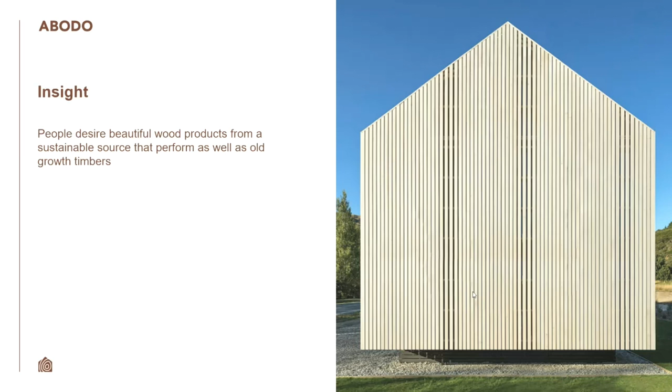So with all that in mind, why do people want tropical hardwoods? People don't necessarily want to deforest tropical rainforests, but what they do want is a timber that looks nice, performs well, and is durable. So we were thinking here in New Zealand, we've got a whole load of plantation timber, and how do we transform that wood that is not stable, not durable, and unattractive to have all of these aforementioned properties? So on the back of that, we formed this ethos and we created this purpose for the business, which is creating a lifetime of beauty with tomorrow in mind.

There's a lot of talk about sustainability and eco labels. Sustainability for me is pretty simple. Is there going to be the same amount or more of this resource for future generations? If yes, then it's sustainable. Or if there's not going to be the same amount or more of this resource for future generations, then it's not sustainable.

And when the Europeans arrived from Northern Europe and the UK, they were confronted with an island that was heavily forested in subtropical rainforest. Trees had never been seen by humans before that were 1 to 2 meters in diameter. And the Europeans, naturally, they got quite excited when they saw this and they started felling the trees, and they did a pretty good job of it. They managed to deforest over 75% of what the landmass was in about 100 years.

The wood was shipped back to the UK for the Royal Navy and other various use case applications. A certain amount of it was used to build New Zealand homes. 95% of New Zealand homes are built from timber frame, timber cladding, etc., much like you'd see in the Pacific Northwest or Canada.

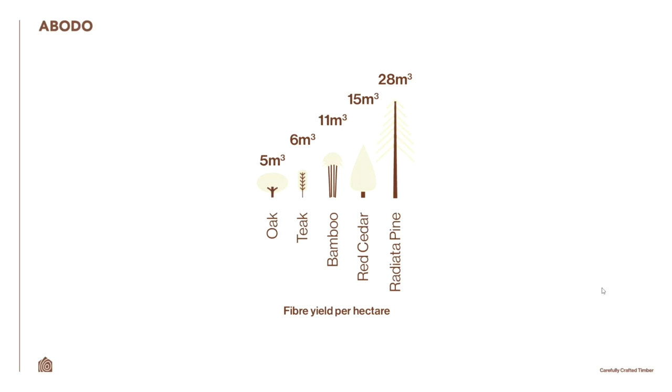Radiata pine's not special. All wood stores carbon. I'm just pointing out that radiata pine stores carbon faster than other species. There are other fast-growing species as well. For example, eucalyptus is also quite fast-growing. Compare that with something else that's commonly used, such as old-growth Siberian larch or old-growth western red cedar, and we're talking about 10 times quicker from a carbon perspective.

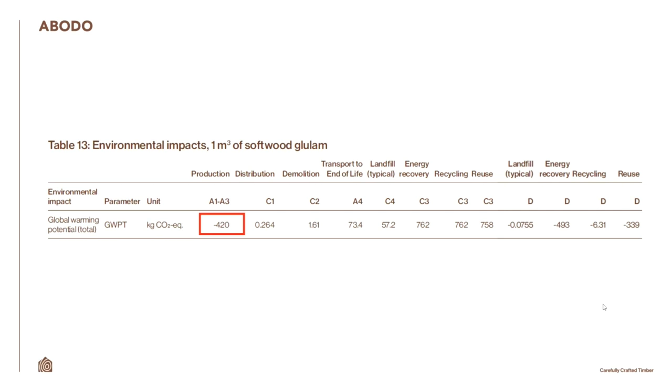For Abodo Vulcan laminated vertical grain, after the thermal modification, laminating, transport to and from the forest, and 21,000 kilometers of sea freight over here to the UK, we're still storing 420 kilograms per cubic meter of carbon. As I mentioned, our EPD covers all of our product variants, so Vulcan sawn, profiled Vulcan. It covers all of our product variants.

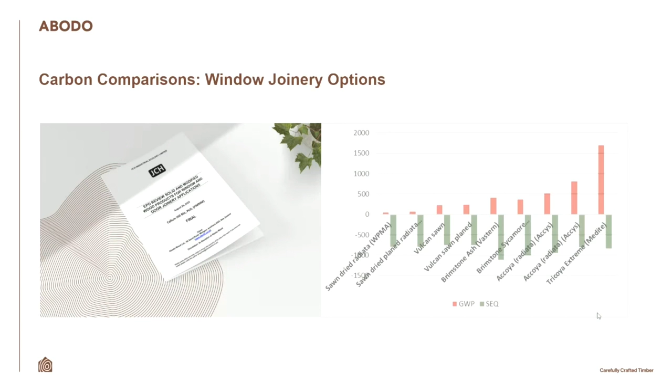What Accoya would quite rightly argue is that they've made a very, very durable product, creating a product that's not going to decay and rot and return the carbon back to the atmosphere. There's a trade-off between the energy and making a product that's durable and getting that balance right.

Thermal modification. On the left-hand side, we've got kiln-dried, sawn radiata pine. And on the right-hand side, you have this chocolatey brown, thermally modified radiata pine product. The thermal modification process is originally Finnish technology. The Finnish really pioneered in this space. ThermoWood's been in the UK market for approximately 10 to 20 years. And typically ThermoWood would thermally modify Nordic pine and Nordic spruce.

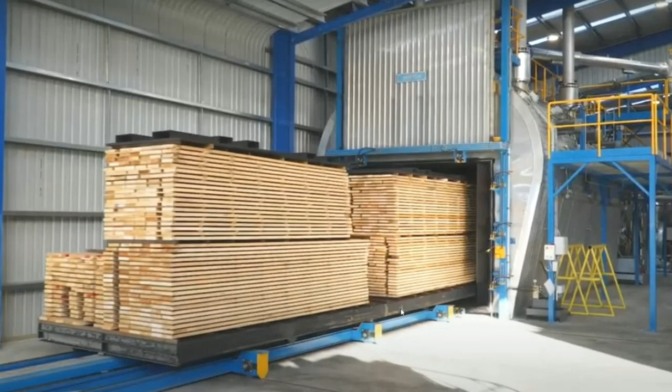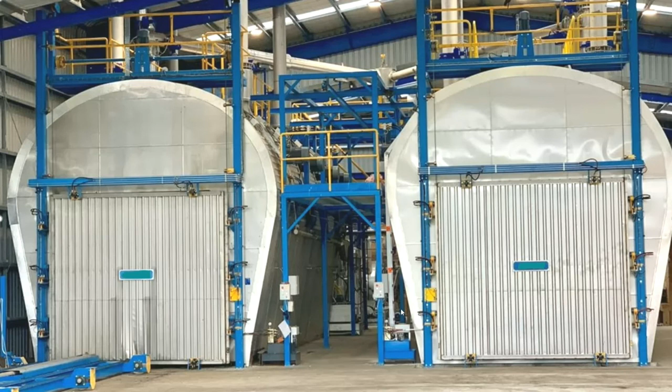We only use Finnish technology ourselves. The Finns had the bleeding edge of the equipment side. And these kilns are specially made and they operate up to 250 degrees Celsius. We have 3 of these kilns in New Zealand and we have 1 in Malaysia.

Abodo's developed a specific schedule for radiata pine. The Finns have a different schedule for their own species, and it's important to make sure that the thermal modification schedule matches the relevant species. So what is thermal modification?

The first phase for us is putting kiln-dried sawn radiata pine into the kiln, and we get it up to our own magic number, which is 230 degrees. This process occurs at a rate of approximately 1 hour per millimeter. So 25 millimeter thick product is approximately 25 hours in the kiln, and 75 mil thick product is about 75 hours in the kiln.

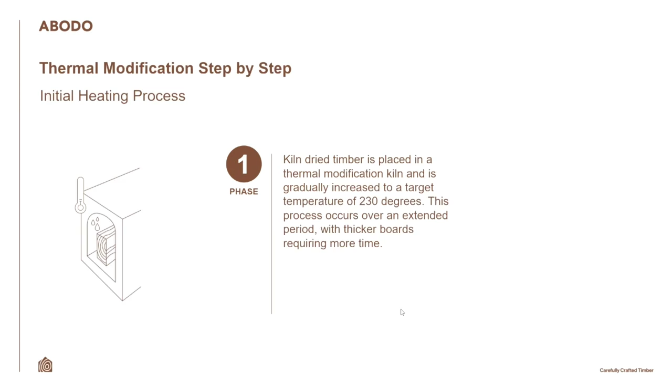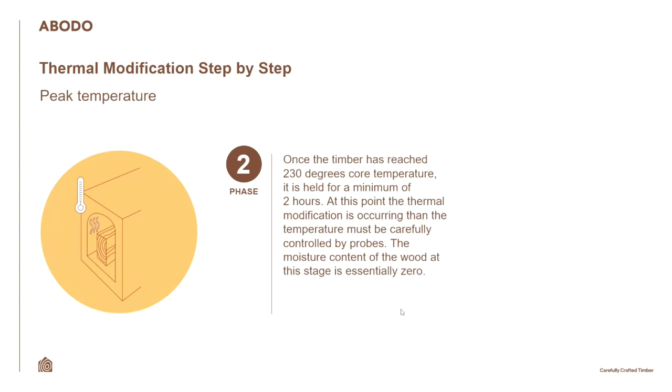So we ramp the temperature up to 230 and we hold it there for 2 hours at a minimum. At this point, this is where the thermal modification process actually takes place, and there's a cellular change to the structure of the wood. The moisture content at this point in time is 0%.

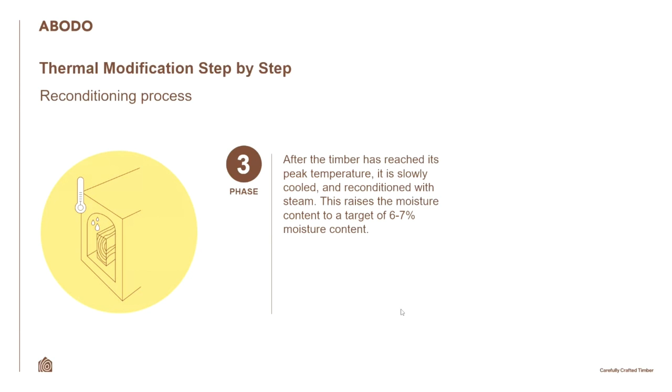Then we recondition the timber with steam to around about 6 to 7% moisture content. This is where the wood naturally likes to sit now after the thermal modification process takes place. So at 65% relative humidity, 20 degrees Celsius, the equilibrium moisture content likes to sit at around 6 to 7%. Decay and rot require 2 things: warmth and moisture. Less moisture in the wood equals less chance of rot.

So as an overview of the thermal modification, what actually happens on a cellular level, if you looked at the end grain of a piece of wood under a microscope, you would see that it looks like a whole bundle of straws compacted together. Rumor has it that there's actually a species of wood where if you cut a small piece, you'd be able to suck up water through the end grain of the timber. So on the left-hand side, you can see a green cell, and this is what the wood looks like when it's freshly cut, full of moisture in the cell and also in the cellular wall.

In the middle here, you can see there is no water inside the cell, but there's still moisture in the cellular wall. When you're air drying a piece of timber outside in summer, you'll easily be able to get water or moisture outside the cell, but you'll always tend to struggle to get the water out of the cellular wall. So if we were to air dry a piece over summer, the water inside the cell would evacuate, but the water in the cellular wall would remain.

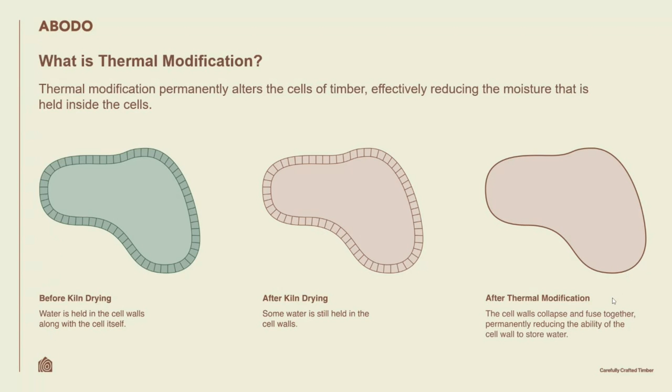What thermal modification does is when we heat it up to that high temperature of 230 degrees for 2 hours, we damage the cellular wall, so it can't hold as much moisture, and that's why it likes to sit at that 6 to 7%. The ability of moisture being held in the product has been reduced.

So what are the advantages and disadvantages of thermal modification? It comes out looking quite aesthetically pleasing, that nice homogeneous chocolate brown color throughout the cross section of the timber. It increases its natural durability up to class 1. It now has enhanced stability. It's got less movement, more dimensional stability now. It likes to move less. Its thermal properties have been improved by about 20%.

It's got reduced resin content in the product. So during that thermal modification process, it bleeds out most of the extractives and resins that are inside the timber. And that's good as well from a coatings perspective. Coating manufacturers don't typically like resins, as they tend to bleed out of the product over time. But during that thermal modification process, we bleed them out for them preemptively. We've got nice long lengths without knots because of the pruning that we did.

And one of the downsides is reduced density and strength. So because we've lost some of the resins and extractives in the wood, it does make it more brittle. So it just requires some more care when handling the product and working with the product.

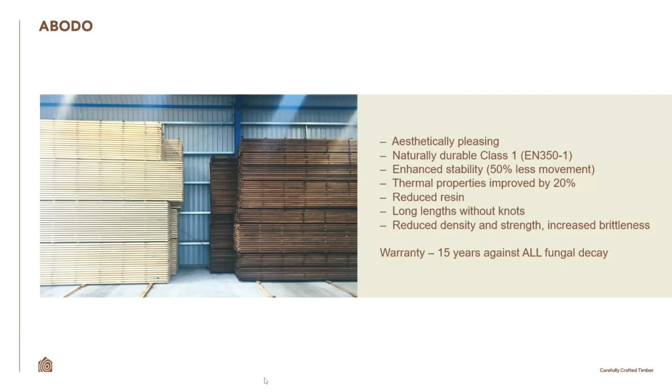Our warranty: we've got a 15-year warranty against all fungal decay, regardless of the species of fungal decay. But we tend to prefer talking about expected service lives. And to back that up, we've got our durability test report data. So this is an example of decay testing that we have back home in New Zealand.

The photo on the right-hand side that you can see, we have pieces of wood sitting on a horizontal, untreated pine bearer, and test samples sitting on top at a 45-degree angle. This untreated pine bearer will rot and pass decay onto the end section of the test samples quite quickly. The untreated pine bearers will rot typically in about 5 years.

We took some test samples of chemically treated wood commercially available in New Zealand as a reference point against our Vulcan timber. We've got chrome, copper, arsenic treated wood, ACQ, or Tanalith E as it's known here in the UK. And we compare them side by side, and that's the way that you can determine the durability of the timber. We did this test over the course of 11 years, and it was monitored by Scion, who's essentially like the BM TRADA back home in New Zealand.

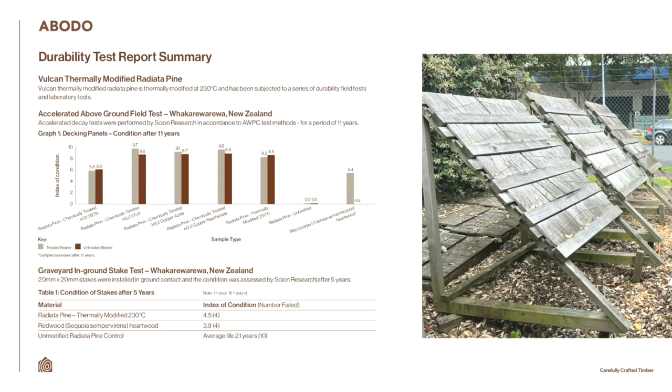Another way is to make 20mm by 20mm stake tests and put them in the ground in what's known as a fungal decay cellar. In this case, we took some Californian redwood heartwood and compared it to our material. So we ended up taking all of that data and we're starting to form a view of how durable our product is. And we submitted that data to a UK research facility, BM TRADA, as we found it was quite important to have a UK perspective and opinion.

And their opinion was that outside, uncoated, and above ground, Vulcan should last 30 years. And for coated, it would have an expected service life of 60 years above ground, out of ground contact.

Casting your mind back to when I was talking about thermal modification recipes for specific species, Nordic spruce and Nordic pine have a slightly higher durability class of 3 and 4 respectively. However, radiata pine has a natural durability class of 5. When we thermally modify radiata pine at 230 degrees, we boost that durability to class 1.

Thermally modifying radiata pine at the Thermowood schedule, or 210 degrees, will not perform in an external environment and will rot relatively quickly. As you can see here, we took a sample piece of radiata pine thermally modified at the Thermowood schedule and we submitted it to the BM TRADA of New Zealand, Scion, and they've said that it shows relatively poor resistance to decay and should not be used in external applications.

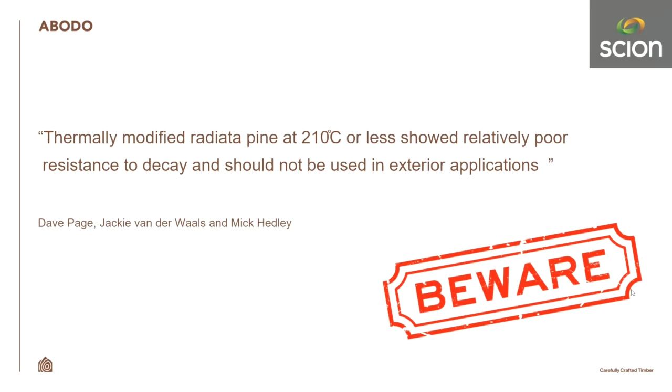Dimensional stability in service is also quite an important factor, both in joinery applications and also in external elements, cladding and screening, for example. We went back to Scion and we gave them some commercially available samples for a swellometer test, which is where they take test samples, they measure them, and then they dunk them in water and they leave them soaking there for 3 days. And then they measure them after the 3 days, and you can see how much they swell.

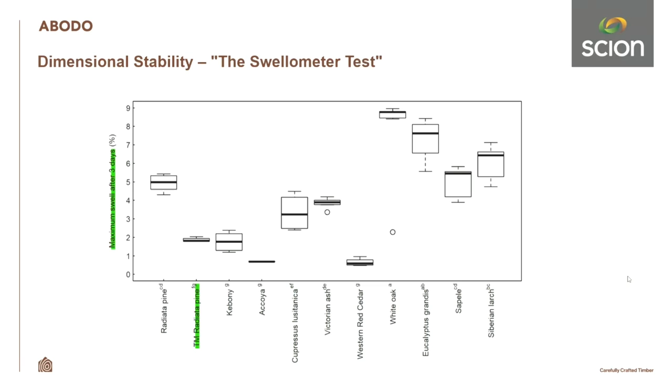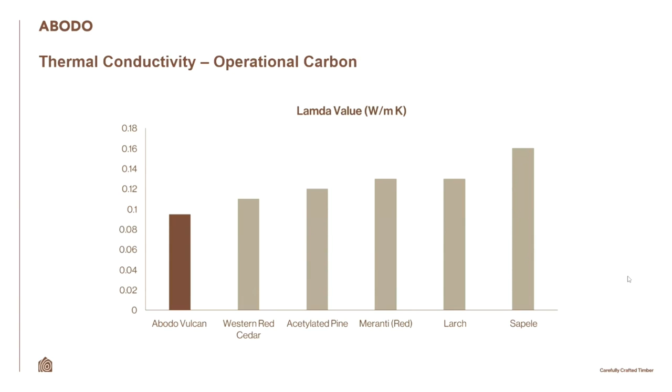I know I've touched on carbon emissions a little bit today. However, the other side of this is to talk about operational carbon. Thermal conductivity is pretty important as well, and that's related to the energy use in your homes. If you use windows and doors that have low thermal conductivity, it's going to keep the heat in for longer. Passive house or passive homes want to use materials that are the most efficient at keeping energy use at a minimum, windows and doors typically being the weak point in the thermal envelope.

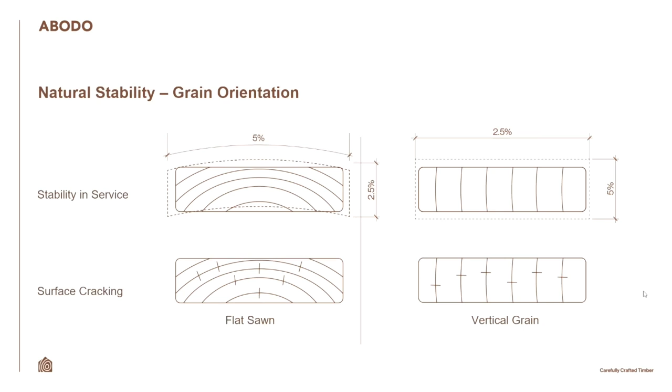If you cast your mind back to the photo of the radiata pine logs, we had the high quality sapwood band on the outside and a defect core in the middle. It would be really hard for us to quarter saw a tree to be able to get vertical grain product out of those radiata pine logs, and we would end up with a defect core piece on the end of each piece there.

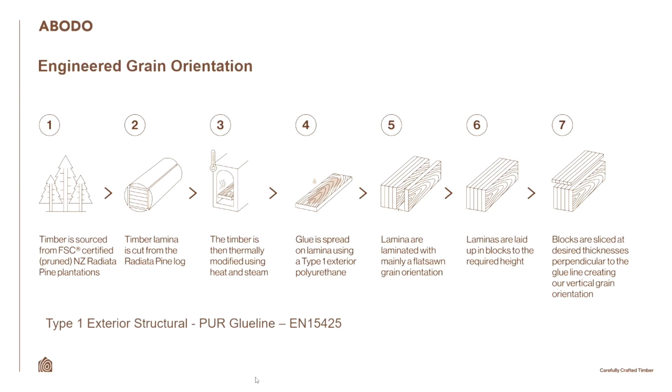So what we've decided to do to get around that is flat sawing out the sapwood band on the outside and face laminating these boards together into master flitches or blocks. And what we do then is we turn the block perpendicular and we cut through the glue lines. And this creates an engineered vertical grain product while also maximizing what we can get out of the logs.

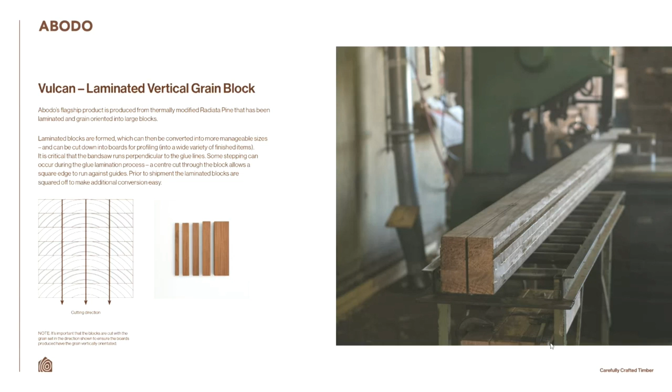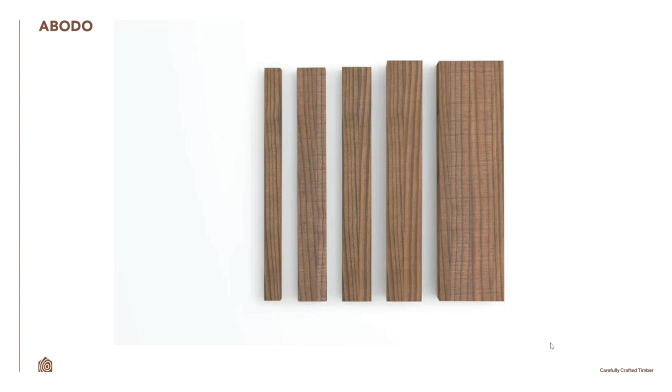It also creates more flexibility from a design perspective, being able to generate larger sectional sizes as required, or even profiling down to a 10mm skin for internal paneling products. Some more photos of the blocks here. You can see them all stacked up. It also creates this aesthetically pleasing vertical grain orientation.

So what's achievable with our products here? I'll run you through some of the product lines that we're able to produce. You've got Vulcan flat sawn out of the flat sawn material there. Vulcan vertical grain cladding. So out of those master flitches or blocks, we're able to run through the glue lines and create cladding profiles of different sizes.

Vulcan vertical grain screening. So screening boards that are able to be used for privacy screens, louvers, internal linings, from a 42 by 18 up to blocks that are 1 meter wide if necessary.

Vulcan vertical grain paneling, so skinning down through the master block there, creating that 10mm skin, using it for internal linings, ceiling and wall linings internally, and also soffit linings, where cost becomes an important factor, but you want to bring warmth into the home. People typically tend to draw similarities to mahogany or walnut. Vulcan flat sawn decking.

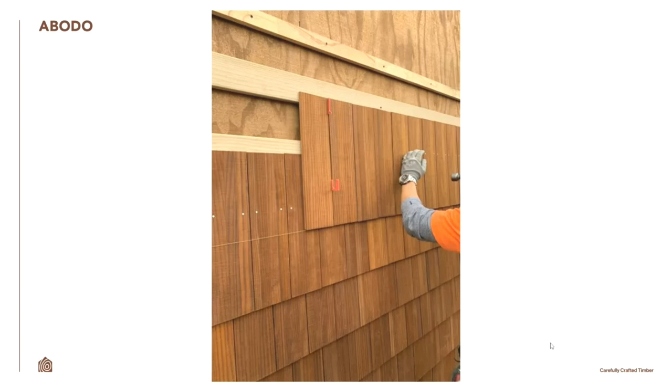Shingles. This is actually a pretty cool product for us. We started doing it relatively recently, maybe about a year to a year and a half ago. We have relatively rough forklift drivers back home in New Zealand, and as I mentioned, the product does now have increased brittleness. So what we're able to do with damaged product is dock the product down and reprofile it and create a new circular product, being Vulcan shingles, and be able to reuse and reduce our waste.

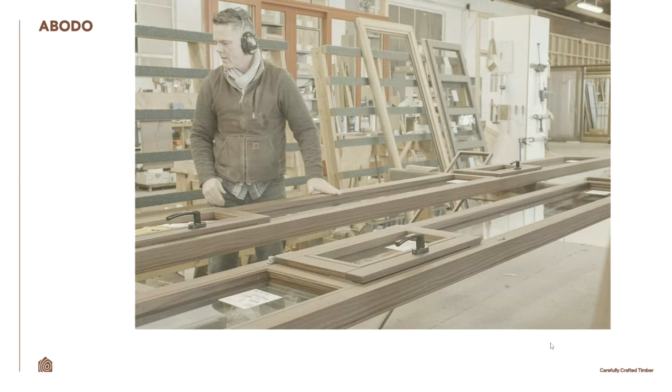Vulcan vertical grain joinery. So this is a German joiner who's based in New Zealand now, creating European tilt and turn windows, where thermal conductivity is an important factor, stability in service, machinability. So joiners typically like to use our product because it machines quite nicely off the back of the planer, less sanding and less prep work involved as well.

I'm going to cut to a video now, 2 videos actually. The first one being from the Baldy Carpenter. Fraser is a joiner who's been working with our product now for the past 2 years. He's based up in Scotland, and he's been using the product because of the aforementioned properties. And the second video will be from Catton Windows, a joinery firm based out in Norwich, who's been using our product for a little while now as well.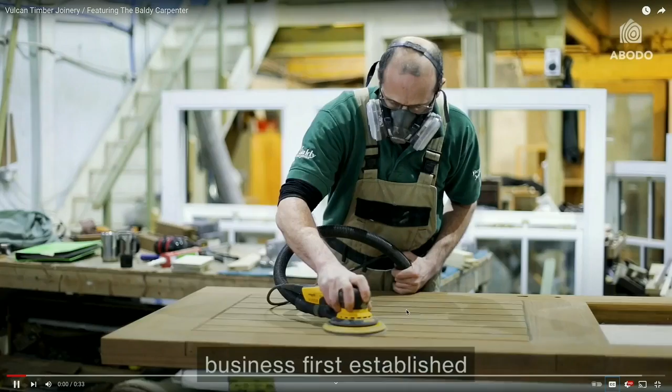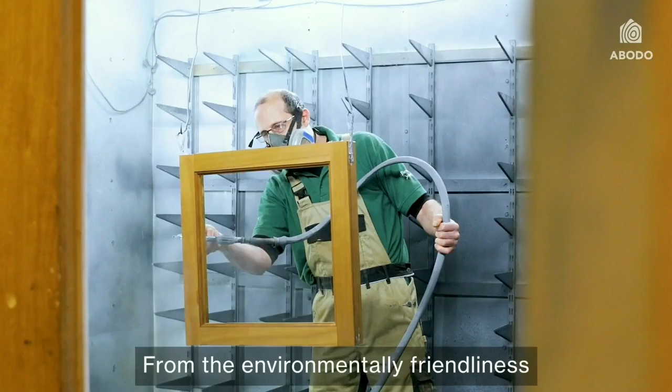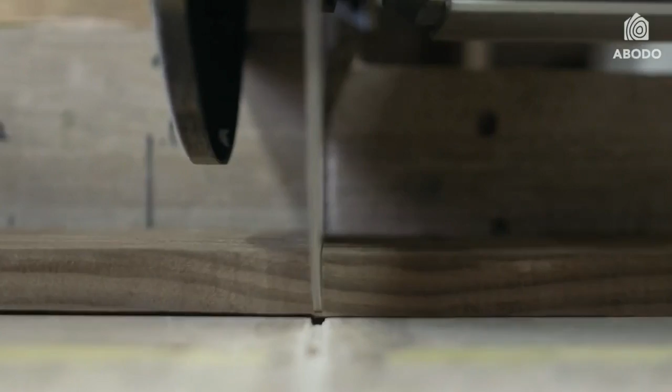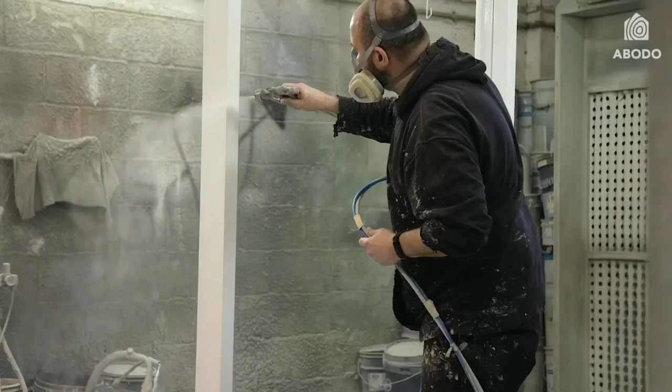When the business first established its products in timber windows and doors, from the outset we realised we had to use a modified timber. After trying several modified timbers, we felt that Abodo was the best placed product to give us what we were looking for. Its environmental friendliness, through to sustainability and its stability, it is the best product that we feel to give a quality product. Abodo timber is not only stunningly beautiful, but it's also incredibly strong and durable, allowing us to create windows and doors that will last for generations. At Catton Windows, sustainability is a core value. We're proud to work with Abodo, a company that shares our commitment to responsible forestry practices. Together, we're crafting beauty and sustainability one project at a time.

So back in New Zealand, we like to take a holistic or a system-based approach, not just supplying a product, but supplying a coating system that we know is going to perform as well, along with the technical support to back it up. This is a little snippet from our website.

The reason why we have these Watch Me Weather videos is, as the timber's quite a dark chocolatey brown color from that thermal modification process, when it gets exposed to the elements, it does tend to change quite drastically with exposure to UV and moisture, specifically lighter tone finishes. So these little videos are time-lapse videos over the course of 12 months, and it gives an indication to the end customer so they know how the product's going to weather over time.

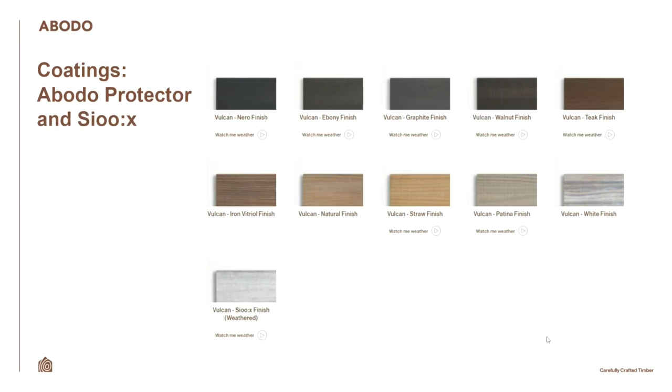Over here in the UK, we thought it was pretty important to have a UK-based perspective again. So we reached out to the 3 leading coating manufacturers here in the UK, Remmers, Sikkens, and Teknos. And we've been working with them quite closely to build up some specifications, and these are now available on our website.

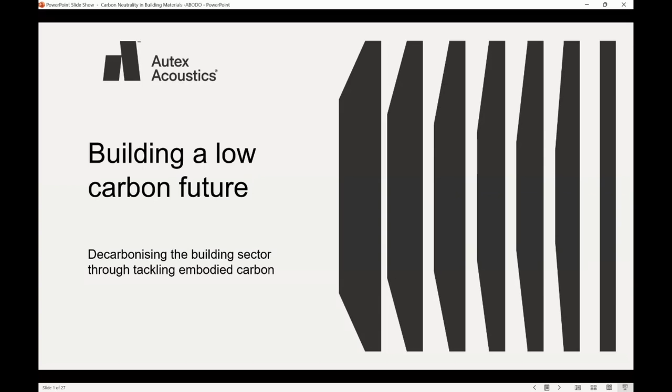So thank you for attending this presentation on how, as a sector, we can tackle the issue of embodied carbon and help build a low carbon future. Over this presentation, we will look at the following topics: the mechanism and impacts of climate change, the targets in place to limit its danger, and the role of the building sector, the importance of embodied carbon emissions throughout a building's life cycle and in building materials, how low carbon and carbon neutral materials can be produced, roadmaps for designers and manufacturers to achieve net zero by 2050, and finally, design considerations for reducing whole of life embodied carbon.

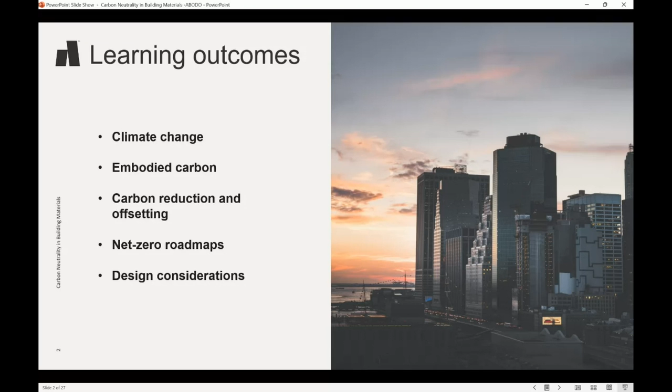So, as you all know, guys, we are currently facing a climate emergency. The Earth's atmosphere has more carbon in it than any point in the last 3 million years. The amount of carbon in the atmosphere is directly correlated with the average global temperature. So since the start of the Industrial Revolution, the concentration of CO2 has increased by almost 50%. Average global temperatures have increased rapidly in the last few decades, driven largely by economic and population growth. The concentrations of CO2 and other greenhouse gases in the atmosphere are unprecedented in our history.

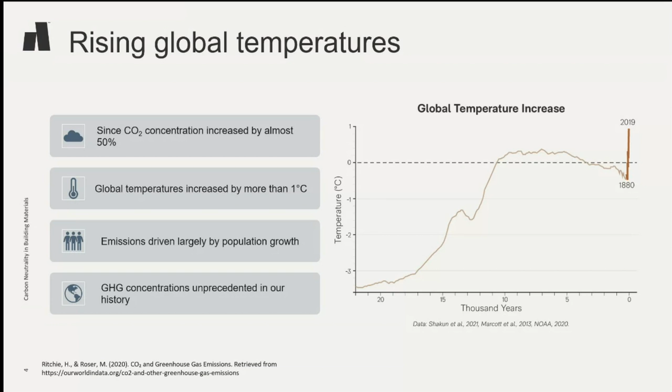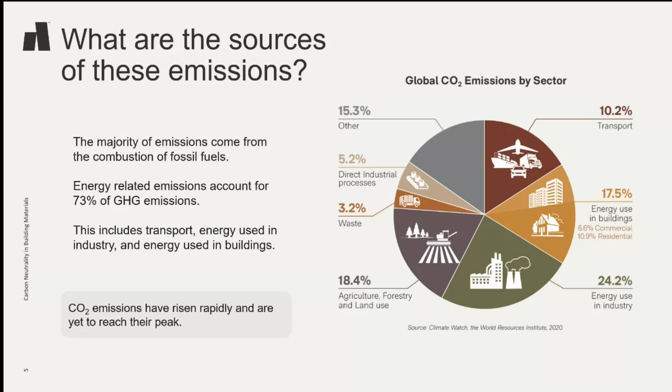The 2015 Paris Agreement's goal is to limit global warming to a maximum of 1.5 degrees compared to pre-industrial levels. By limiting global warming to 1.5 degrees compared to 2 degrees, the number of people frequently exposed to extreme heat waves would be reduced by 420 million. The probability of drought would be significantly reduced, as would the risk of flooding, extreme weather events, and sea level rise. As of 2022, achieving a 1.5 degree limit is not impossible. However, the window is obviously rapidly closing.

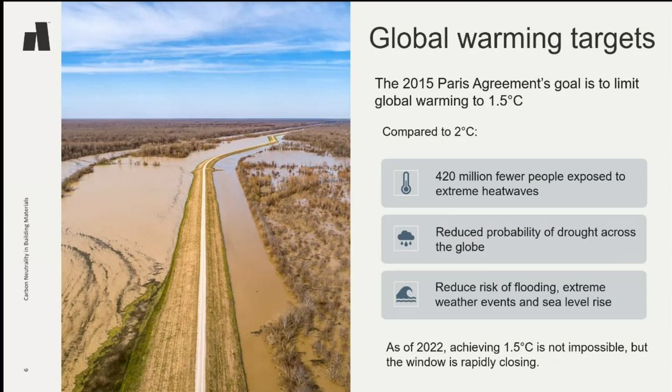Electricity consumption for building operations, including heating, cooling, and lighting, represents nearly 55% of global electricity consumption. Buildings generate nearly 40% of global energy-related emissions, with 10% of these emissions coming from building materials and construction. And when you look at the facts like that, it's actually quite wild.

Projections show the energy demand and related emissions of buildings may double or even triple by 2050. The building sector therefore has a critical role to play in addressing the risks of climate change.

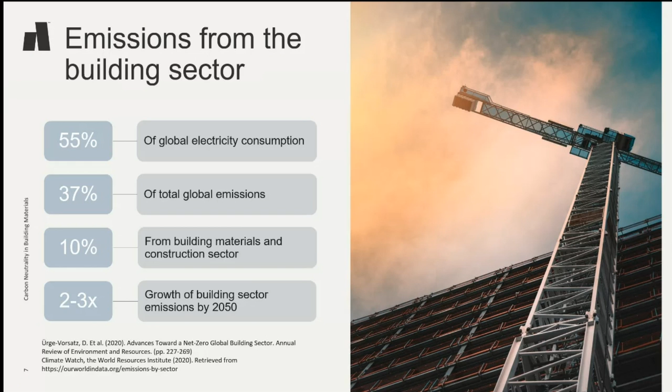So changes in emissions over recent years are driven by a number of key trends. Operational emissions are all emissions associated with running a building, such as heating and lighting, and these have been increasing following a stable period between 2013 and 2016. This is due to the heightened use of appliances and HVAC systems. Households with access to these systems grew by 8% from 2010 to 2020.

Usage of these systems has also increased due to more extreme weather events, very high temperatures, severe heat waves, and even cold snaps. Although overall emissions are still increasing, due to energy efficient design and advancements in technology, building sector energy intensity, measured as final energy use per square meter of building floor, has actually been decreasing continuously since 2010.

Approved Document L provides guidance on compliance to energy efficiency requirements for dwellings and non-domestic buildings in the UK, including limiting heat gains and losses and calculating target energy efficiency rates.

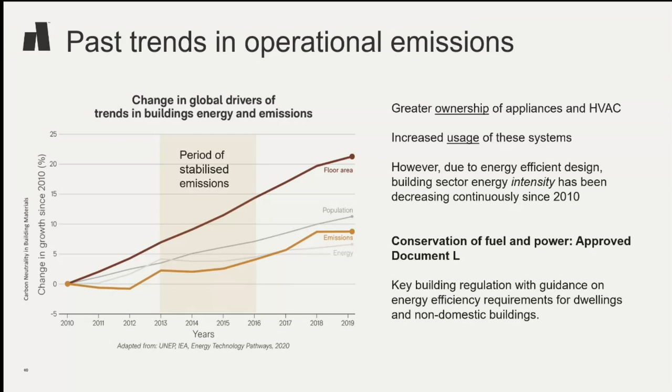So the main driver of future emissions is the increasing need for housing with electricity and cooking facilities for billions of people. The global building floor area is expected to double by 2060. This is equivalent to adding an entire New York City to the planet every month for the next 40 years. The way in which these energy demands are met will significantly determine future carbon emissions.

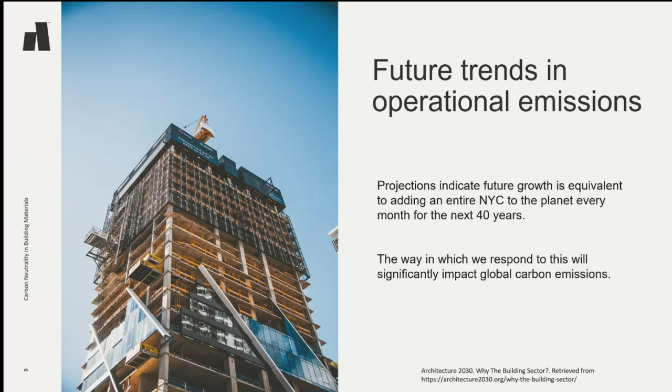So embodied carbon refers to all of the CO2 emitted throughout the life cycle of a material, product, or building. For buildings, this is all the emissions associated with the materials and construction processes throughout the life cycle of the building. This can be considered a building's carbon footprint before it becomes operational, all the way through to end of life. Despite making up around 10% of all global emissions, embodied carbon has typically been overlooked.

Most of buildings' embodied carbon emissions occur upstream of the building itself and are largely invisible to the architect or builder. Given the scale of new construction projected over the coming decades, it is critical that embodied carbon is considered in the design and construction of buildings that are being built today.

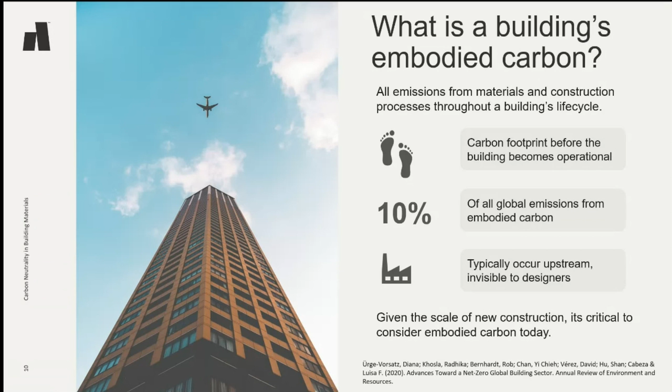So the World Green Building Council, WGBC, which some of you will know, has produced an embodied carbon report for coordinating action to tackle embodied carbon. The targets laid out by the report are, by 2030, all new buildings, infrastructure and renovations will have at least 40% less embodied carbon compared to business as usual. By 2050, new buildings, infrastructure and renovations will have net zero embodied carbon. Net zero embodied carbon basically means that no carbon is emitted over any stage in a building's life cycle.

So the construction of a building, its usage over time, and its eventual demolition create long-lasting impacts on the environment. A life cycle assessment, LCA, is a standard way of measuring these environmental impacts, including the carbon emissions associated with each stage of a building's life cycle.

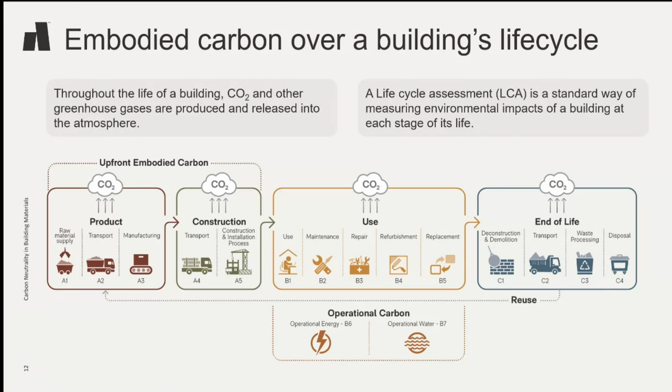Emissions associated with the product and construction stages up to practical completion are referred to as upfront embodied carbon emissions. They can also be considered as today emissions, emissions that have been released at present. So these include emissions caused by the extraction and processing of raw materials, the energy and resources used by the factory for manufacturing of the product, the transportation of materials to site, and the construction of the building.

Emissions associated with the materials and processes needed to maintain, repair, refurbish and replace materials in the building are called use stage emissions. These are separate from operational carbon emissions, which are associated with the energy and resources needed to operate the building in its use stage.

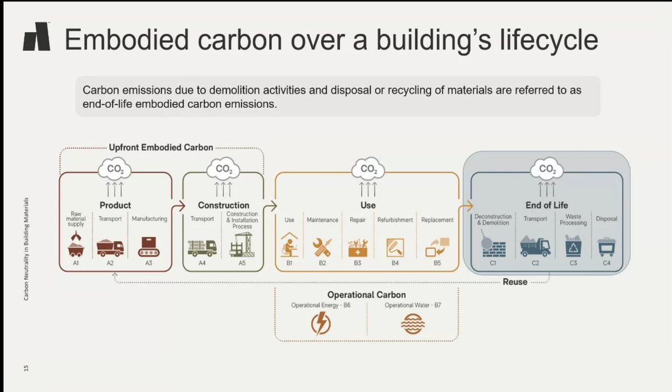So emissions due to demolition activities and disposal or recycling of materials are referred to as end-of-life embodied carbon emissions. And then the upfront, use stage, and end-of-life emissions make up the whole of life embodied carbon emissions of a building.

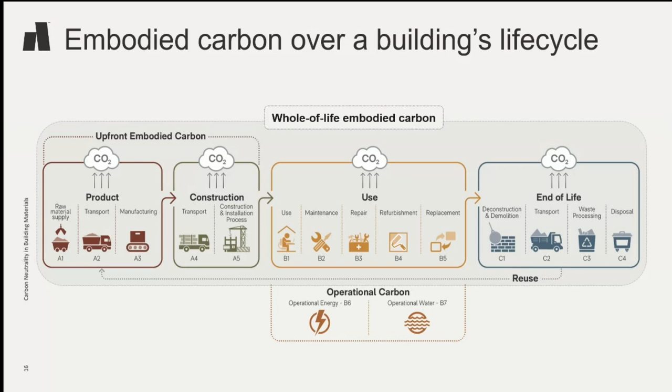So, what are the main sources of embodied carbon? In terms of materials, concrete, steel, and aluminium make up a large majority due to the carbon-intensive processes used to make them. Glass, plasterboard, and paint also provide substantial contributions.

In terms of a building's structural elements, foundations and frames often represent the biggest contribution. The enclosure is also significant as it represents around 11% of the embodied carbon of a typical commercial office building. This includes the cladding, the windows, and insulation materials.

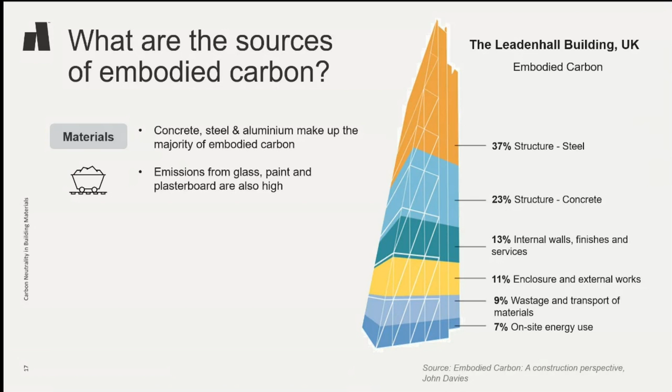So, how does carbon offsetting work? A carbon offset is generated by an activity that either avoids, reduces, or removes GHG emissions from the atmosphere. These can be purchased and traded in the form of credits that typically represent 1 ton of GHG emissions. Carbon credits are generated from projects all over the world and purchased by companies who are interested in voluntarily offsetting their carbon footprint.

Buying carbon credits provides a direct financial contribution to support carbon projects, allowing them to continue reducing emissions and benefiting the communities around them. So once a certified carbon credit is purchased, the credit is retired from the register, so it may not be used again. This provides full transparency and ensures the carbon credits are real, measurable, and also permanent.

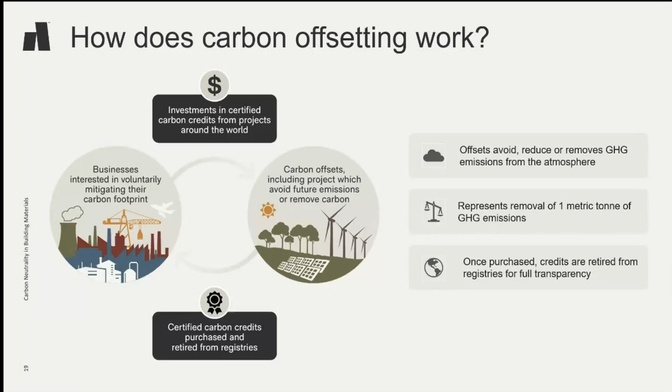So for manufacturers, the World Green Building Council's Net Zero Roadmap states that from 2020, companies should have started developing carbon reduction targets with timelines set to achieve net zero embodied carbon by 2050. By 2025, manufacturers should have product-specific environmental product declarations, or EPDs, covering the top 40% of their product portfolio. By 2030, the environmental impacts of the entire product portfolio should be declared via EPDs.

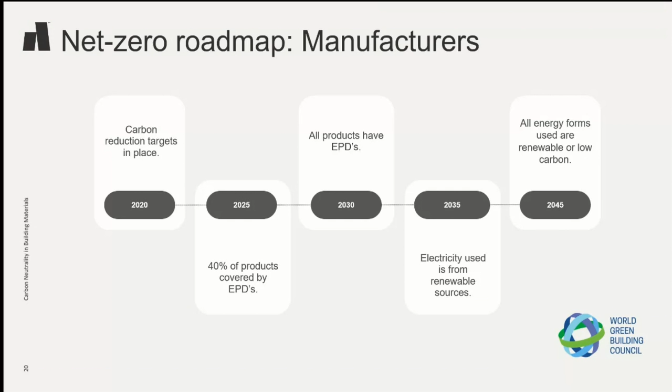By 2035, all electricity for manufacturing and transport is from renewable or low carbon sources. And then by 2045, all forms of energy used in manufacture and transportation are renewable or low carbon. So, determining the embodied carbon of any material depends on the self-assessment and process transparency on the part of the manufacturer. So that's really crucial for all manufacturers, especially for Autex.

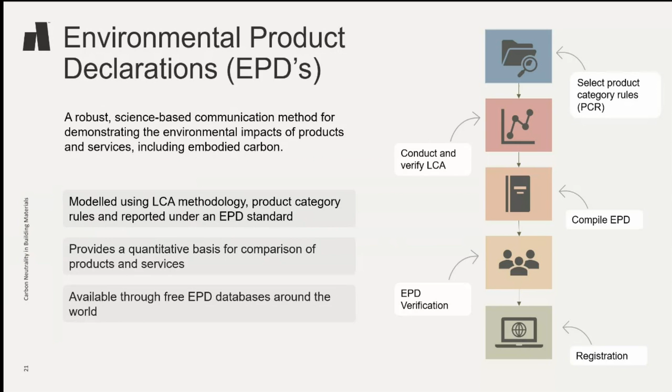So EPDs provide a robust science-based communication method for demonstrating the environmental impacts of products and services, including embodied carbon over their lifetime. To produce an EPD, first the category rules are selected for the product type, then their environmental impacts are calculated through a standardized life cycle assessment. This data is then verified and compiled into the EPD. The EPD provides a basis for comparing products and services, and they are registered and stored on free databases around the world. EPDs are an essential tool for evaluating environmental performance and selecting sustainable products for a project.

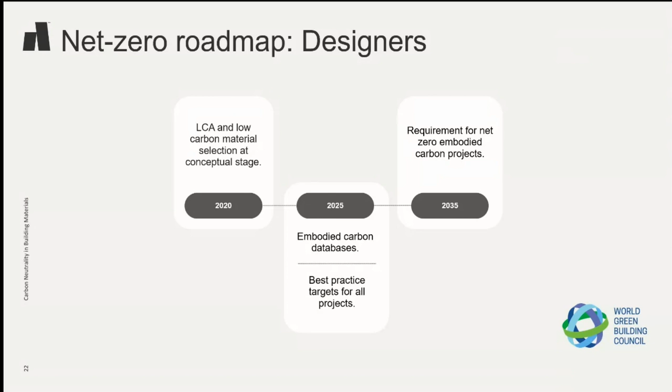So designing for net zero. Building designers have considerable influence through interventions from the earliest design stages where mindful decisions around embodied carbon can be made. They are in a good position to challenge conventional approaches and facilitate awareness with progressive design, coupled with high potential to influence their supply chain through requesting EPDs and product data and increase the demand for low carbon or carbon neutral products.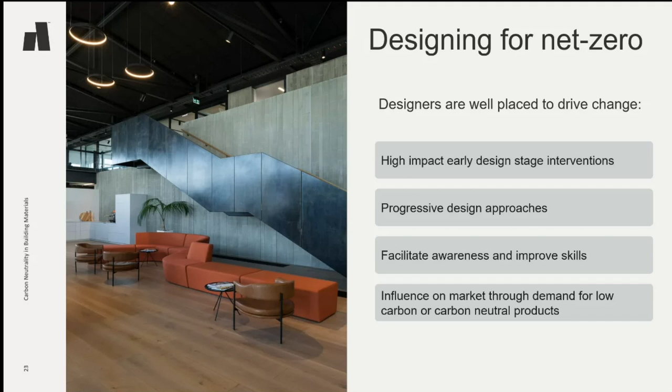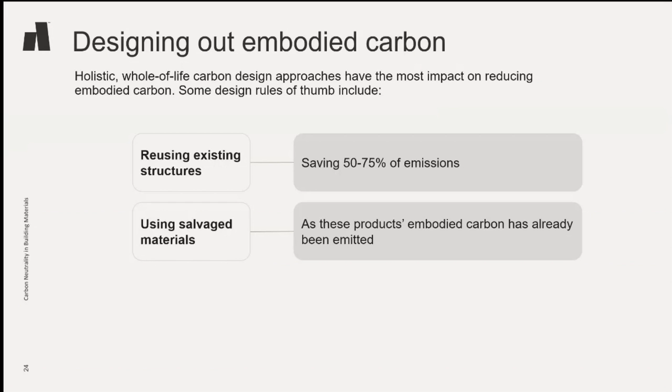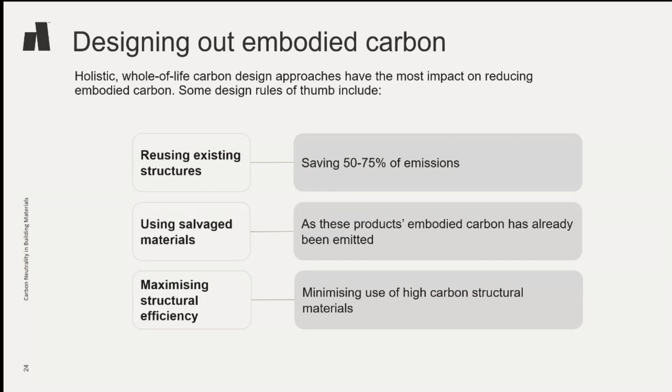So holistic whole of life design considerations have the most impact on reducing embodied carbon. Some design rules of thumb include reusing existing structures, so reusing and repurposing existing structures where possible. This can save between 50% and 75% of emissions compared to constructing a new building. Wherever possible, salvageable materials should be reused as their embodied carbon has already been emitted. And then through maximizing structural efficiency, that's a very hard word to say, efficiency, the use of structural materials can be minimized.

So to summarize, we are currently facing a climate emergency, as we stated at the beginning of this presentation. The building sector emits a large proportion of global greenhouse gases and is uniquely positioned to reduce future emissions over the coming decades, where there will be substantial growth in the building floor area. We are also seeing encouraging reductions in the intensity of operational emissions, which will lead to a greater relative proportion of emissions from embodied carbon. And if we are to limit global warming to well below 2 degrees, the building sector must meet net zero targets by 2050, where all new buildings, infrastructure and renovations will have net zero embodied carbon.

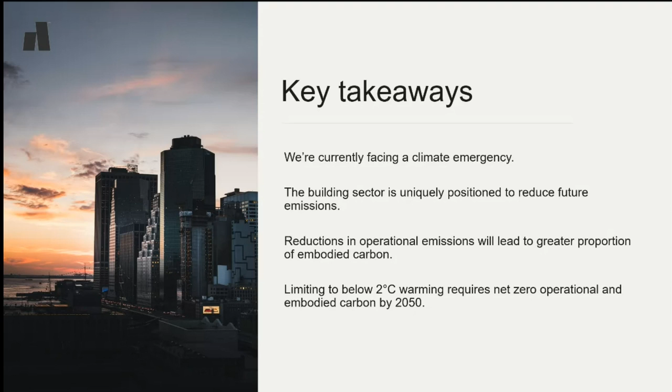So in order to achieve this, achieving these targets will require the integration roadmaps of relevant stakeholders, including the client, the project manager, the architects, the manufacturers and the building owners. Designers have a large influence through interventions from the earliest design stages, and this involves conscientious material selection of low carbon or carbon neutral products and holistic low carbon design approaches across all phases of a project.

Manufacturers should adopt carbon transparency through publishing EPDs to inform decisions while actively reducing their products' embodied carbon and offsetting remaining emissions. The increased supply and specification of low carbon materials will help achieve the vision of a decarbonised future for the building industry and limit the impacts of climate change.

And I think that's the end of the presentation. I'm not sure if maybe it's quite quick, but I hope that kind of wrapped up carbon in a nutshell. And I did mention carbon probably about 50,000 times, so I hope you are more well aware of the word. But if you have any questions, please let me know.

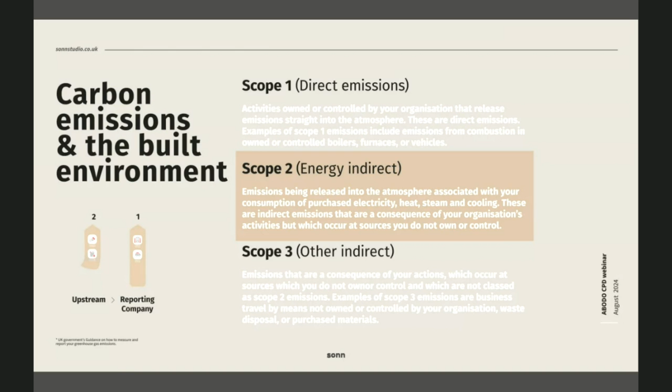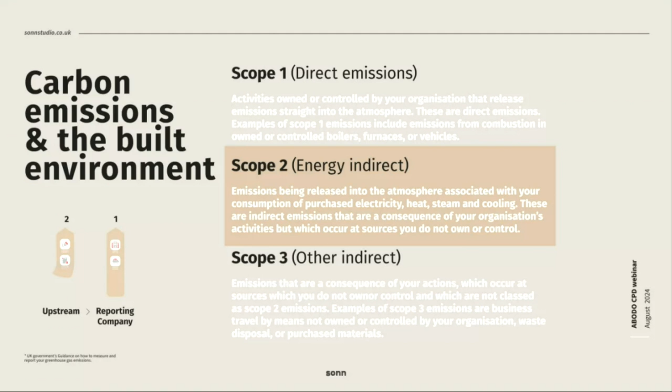Then scope 2 is indirect emissions: emissions released into the atmosphere associated with your consumption of purchased electricity. Examples are electricity consumption on the site, used to power tools, equipment, lighting, and also electricity for temporary offices, such as trailers for project management staff. So these are all indirect energy sources on a construction site.

And then scope 3 is other indirect sources. Scope 3 covers all other indirect emissions that occur during a company's value chain. This is often the most significant source of emissions in the construction industry. Examples would be emissions from material production, so production of construction materials like cement, steel, glass, bricks, or any other material used within the construction of the building. Also transportation of materials and waste.

Employee commuting as well is in this scope. Also subcontractor emissions, so emissions associated with subcontractors' activities, including their use of materials and energy. Then also end of life treatment of materials is also involved in this scope 3. So emissions related to the disposal of recycled materials after the construction project is completed.

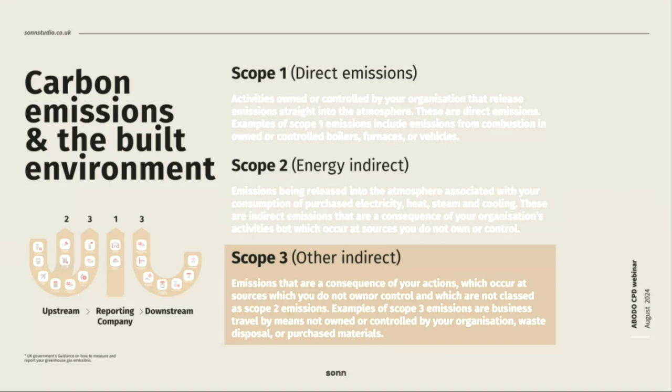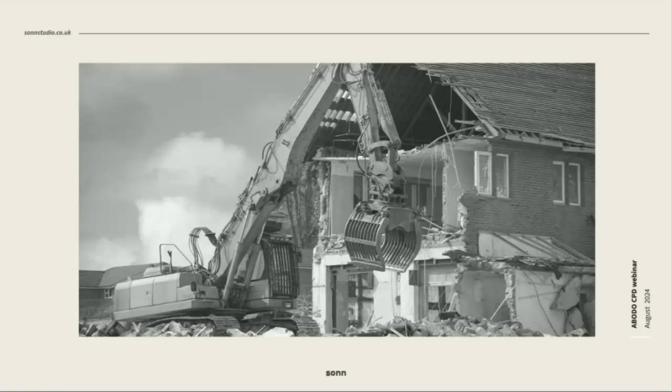So there's quite a lot of aspects which are included in this scope 3 item. So what we can gather from that is that there's a lot of aspects which are involved in this scope 3 item. And then I suppose one of the questions we get asked a lot as an architect is how can we reduce the overall embodied carbon, but also that scope 3 item, which is probably the aspect that we will have the most impact on.

And what we think is the best approach and the best way that we approach a project is we consider it as a fabric first approach. So what will have the most impact? As architects and designers, it's considering the selection of products and lowering the embodied carbon of what is involved in the selection of those products.

So put simply, this fabric first approach involves prioritizing the building envelope first. So walls, roof, floors, windows, doors, to create a high performance, energy efficient building. This approach considers the building's fabric as a primary means of reducing energy consumption rather than just relying on mechanical or electrical systems.

So this is the best way to approach a building initially, especially with refurbishments of buildings. Instead of putting in lots of high energy intensive mechanical systems, it's thinking about how can we deal with the fabric first, and this is the approach that we like to do initially, rather than relying on mechanical or electrical systems to reduce the overall carbon usage of a construction project.

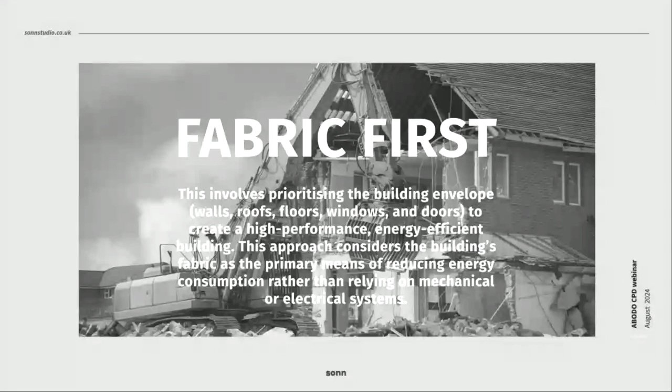But having a fabric first approach means that the material selection obviously becomes even more important. So, like I say, I know Emma's touched on this before, but obviously the actual material selection means that the actual embodied carbon within that material becomes even more important. So just to clarify again, what actually is embodied carbon?

So embodied carbon is all the CO2 emitted in producing materials, and it's estimated from the energy used to extract and transport raw materials, as well as emissions from manufacturing processes. So the embodied carbon of a building can include all the emissions from the construction materials, the building processes, all the fixtures and fittings inside, as well as from deconstructing and disposing of it at the end of its lifetime.

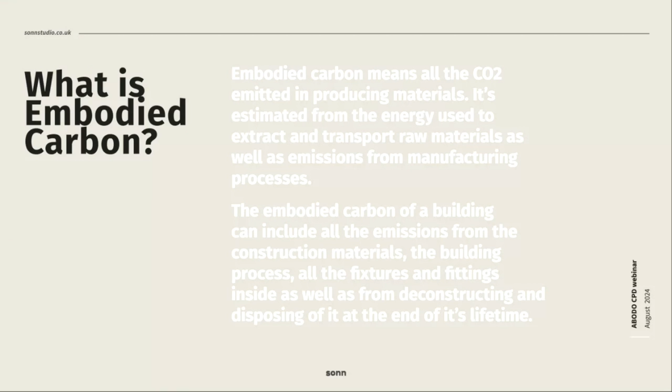I think there's ways that you can clarify or assess this, and obviously there's many analysis or environmental assessment methods. Obviously BREEAM, LEED, SKA are all methods that we use to assess the environmental impacts you are having on your specific project.

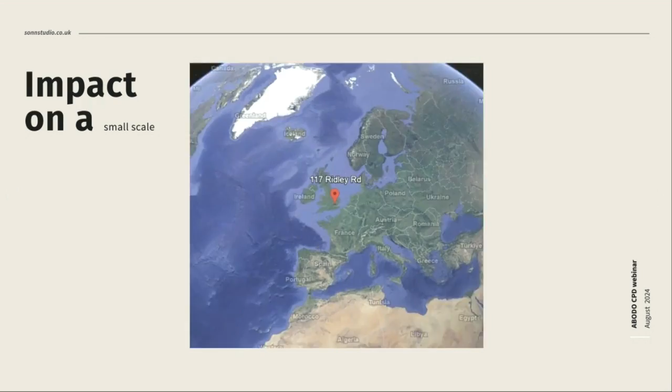So therefore, this reinforces the need to consider reducing embodied carbon in our buildings. So what I wanted to do is showcase how we've done this on a small scale. So I wanted to show you a project that we've been working on. So what we've done here is zoom in onto a project that we're working on. This project is located in London, in Hackney.

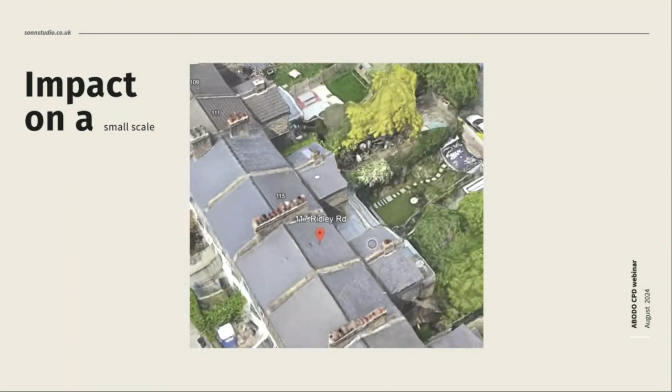And as you can see here, I'm just rotating around. It's a traditional Victorian terraced house, located on a busy market street. And the client had a lower ground floor flat within this building. I'm zooming again. And I suppose what they were asking for is they wanted to see how they could improve the quality of space within the property. It was previously a very restricted single 1-bed apartment. It did have a really great garden, but it had very little connection to that garden.

So this is the property here. The red line denotes the extent of the site boundary. And the photographs on the right-hand side showcase the existing property. So for people in London, a very typical 1800 to 1900 Victorian terrace house. Obviously, very little connection to the garden. It's just got an existing courtyard space. Very small amounts of natural light as well into the space.

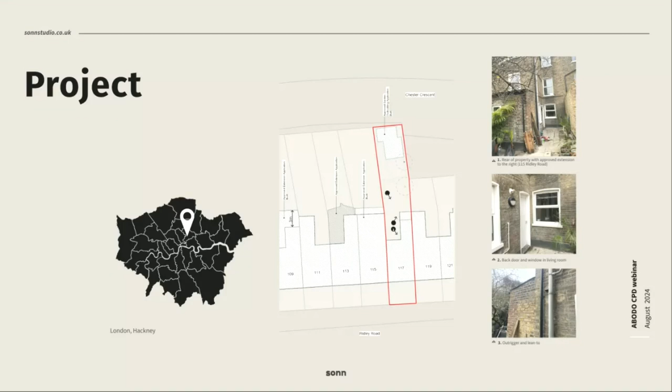So one of the key aspects of the brief from the client was increasing that connection to the garden, but also adding an additional bedroom. And also they were keen on sustainability, but also having quite a natural and organic feel. It's quite a busy street at the front of the house. So they really wanted that feeling of escape from that really busy central street, so they can move to the garden and have that inside-outside connection with the kitchen living space, with great use of natural light and natural materials.

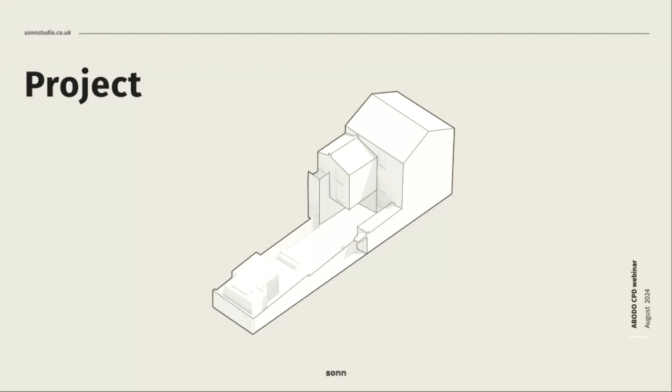So we approached the project, and this little diagram gives a very simplistic form of the strategy and approach that we took. We took out the lower ground floor element below the outrigger, and then aligned and slightly chamfered this new extension to align with the neighboring buildings, while also interjecting roof lights into the space to get as much light as possible into the space.

Another key element was joinery and storage, and making a clean space. I think especially in a small flat, storage and having areas that can hide elements was really key. So along this full back wall, we had a full storage wall, which allowed you to conceal a kitchen, pantry, and storage. But it also had a dual use as well.

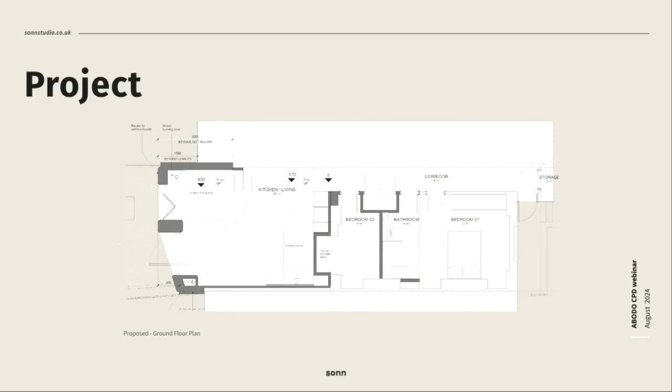So, like I say, this is the project that we were working on. This was the brief that we were given. So then the question we had was, how could we implement low carbon strategies into what is a very small scale project? We were thinking that there must be certain ways that we can help reduce embodied carbon within this project. And we came up with, I suppose, 5 key aspects.

It's 5 key ways, or elements, that we try to implement on smaller scale projects. First one, use of natural low carbon materials. Second one, local sourcing. Third, sustainable construction practices. 4, design for longevity and durability. And 5, aesthetic and functional integration. So what I'm going to do is just showcase how we've done this on this project.

So the first one, very obvious, use of natural low carbon materials. So the actual material choice. On this project, we went for a lime plaster. The project predominantly features the use of a lime plaster. It's a traditional material with a lower embodied carbon compared to modern cement-based plasters. And lime plaster has the ability to absorb CO2 as it cures, slightly offsetting its carbon footprint.

As well as that, we also use a lime wash finish internally, as well as the lime plaster externally. Lime wash is basically a thin layer of limestone that dries on your wall and actually takes in carbon dioxide from the air as it dries. Also, we really wanted to use natural finishes. Really simple natural finishes which felt organic and didn't feel contrasting to the external greenery of the garden.

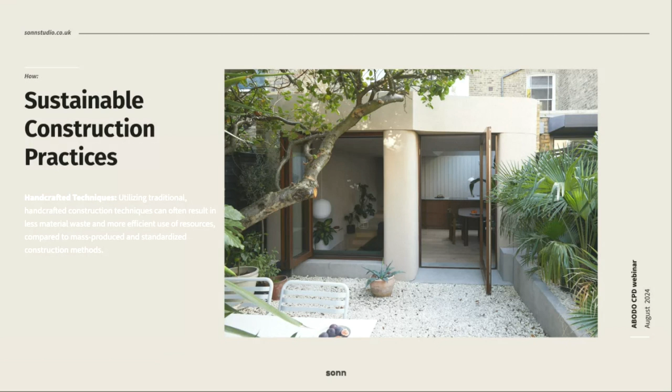handcrafted traditional techniques. So although the building form that we wanted to create had a tropical modernist feel to it, the use of lime plaster, although in a modern application, has been used in the UK since the 14th century. Also the timber windows are from a UK-based company who traditionally supply very traditional sash windows, which are used across a lot of the Victorian terrace houses. So really utilizing local skills and knowledge and trying to use local materials where at all possible.

And another one, which I suppose can be forgotten about or pushed aside sometimes, depending on the client, is that we really drive for design for longevity and durability. So how can we make our designs and our projects actually be durable and last a long time? We really want to stop a building being designed and ripped out within a few years.

That's not really what we're about. We're about longevity and providing long-lasting, durable materials, which reduce the need for frequent repairs and replacement, which in turn lowers the long-term embodied carbon of a building. Also, we really want to reduce the amount of plastics and laminates in a building.

So all of our timber is either solid European oak, or we use veneers. So no laminates in the buildings. Natural terracotta tiles, a durable, traditional material, which we use in the bathroom, as well as marbles and terrazzos, really traditional techniques and traditional stones, but obviously known for being durable and long lasting.

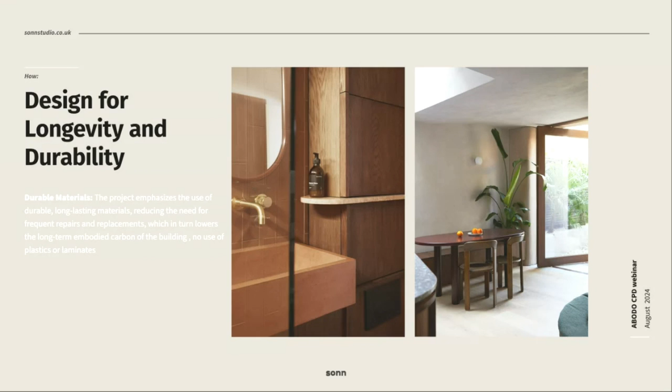And the last one of these aspects of how we've lowered embodied carbon is quite a strange one, but I think is important: aesthetic and functional integration. By designing with materials that serve both an aesthetic and functional purpose, the project avoids the need for additional decorative layers of treatment, thus reducing the material use and associated embodied carbon.

So we always try, in all aspects, to use materials which celebrate the actual material: timber, wood, stone. They are all the actual natural material. And I think creating a project which celebrates those materials rather than decoratively covering them up is a great way of reducing the actual material use within the building.

So I think that's a really great way of having a beautiful space, but actually making sure that you reduce the amount of material and product you put in the space, which eventually means you can reduce the overall embodied carbon within the project.

So hopefully that gives you a very quick overview of how these small scale measures can collectively have a really big impact on the overall industry. And hopefully it shows how we've done this on a small scale project, and how you can as well. Great, thank you very much.